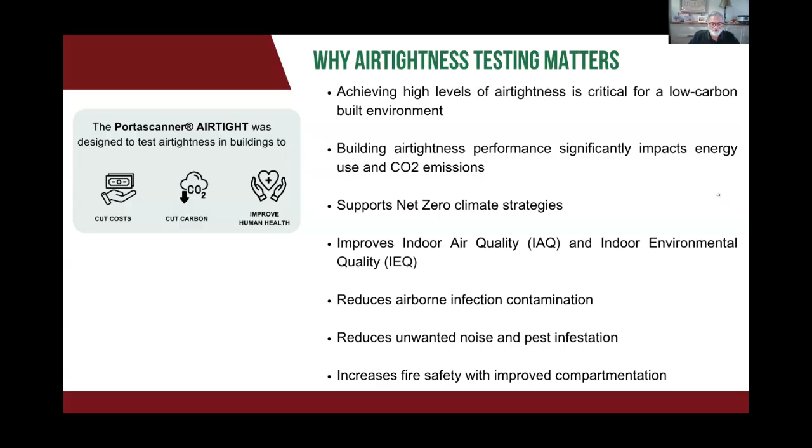Okay, so typically when we talk about airtightness, I think we're all familiar with the blower door. That is still required by most certifying bodies, from ResNet to PHIUS to PHI. It measures the air changes per hour, and it will tell you when something is wrong, but it will not tell you what is wrong, where that is, and how to fix it. So to do that, how do we find and localize what is causing the blower door failure?

The oldest method is probably smoke pencils. Old enough that I've heard stories of people just walking around with lit cigarettes in the old days. But if not that, smoke pencils, seeing where the smoke is being drawn to, is useful, but obviously scattershot. And the bigger the building, the more difficult that is and harder to replicate. It also requires a level of pressurization, so you have to already have a contained, enclosed building for it to be effective.

Anemometers can be helpful if you know where the leak is, but a lot of the trouble is finding that leak in the first place. There's a problem somewhere, you're not sealed tightly, but you don't know where. It's a pinpoint tool that would require you to either already know where the leak is, or have a ton of patience going inch by inch to identify where it is.

And then finally, thermal cameras, which are effective if you have a temperature differential from the inside to the outside, which is not always the case. Also, if you're in mid-construction and it's not fully complete and you're exposed, it's basically useless. It can be very good for thermal bridges and those sorts of things, again if you have a temperature differential, but not necessarily the best way to find an air leak.

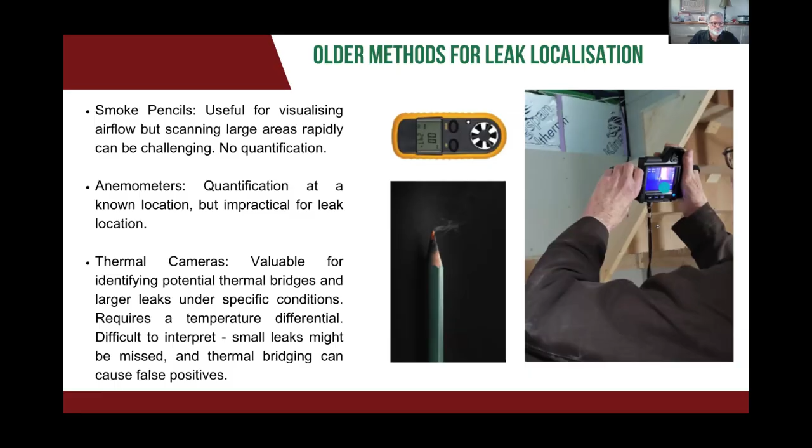So with those kind of imperfect tools at hand, what are we looking for in a better tool? What would it have to achieve? We really need to be able to quickly assess the airtightness of the building, and to be able to do it at any stage of construction. One of the tremendous downsides of the blower door test is obviously the preparation required, sealing everything, closing everything down, usually removing the crews for some period of time, and then just getting that overall binary yes or no, without any accuracy as to where the problem is.

It's intrusive, it's disruptive, it's expensive if you're hiring someone else to come implement the test, only to find that you've not achieved your goal and then have to schedule another one after you've done the work of finding it.

So what we want is something that's accurate, something that is easily set up, that can be repeated through different phases of construction, something that has an unambiguous result, right? It's not "somewhere there's a problem." It lets us localize exactly where the failures are so we can focus on what remediation is needed. And those really work together.

We'll talk a little bit later about how we at Source are seeing people use the technology in the North American market. It can be deployed quickly, repeatedly, each step of the way, for very little cost and with very little time. It doesn't become a whole milestone in the process where you're building towards the blower door coming; it's just, hey, let's quickly run a scan, see how we did. And you can do that each step of the way. So I think it represents a tremendous value beyond these other methods.

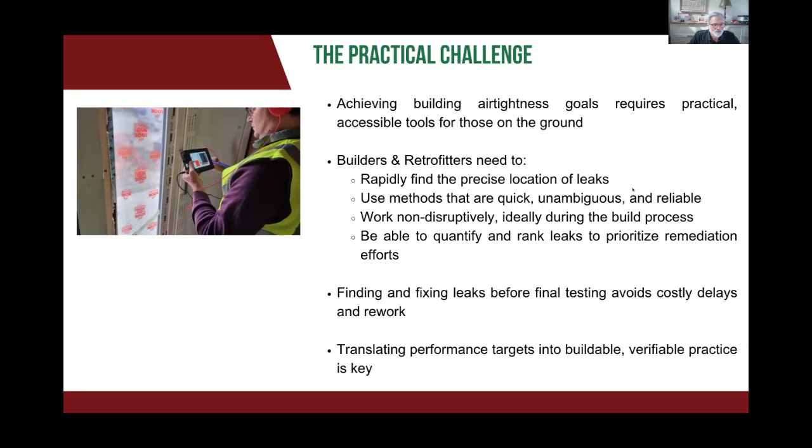I'm going to be very happy to dig into that a little bit, but I think Daniel wants to talk to you a little bit about the development of the technology, and then I'll be back in a minute.

Thank you, John. So the development of the technology is quite an interesting history. Our company's been around for over 30 years, and an industry which we have been in for that long is the maritime and naval sectors. Watertight integrity is a really important factor in that, and we've developed technologies for that for years and years. It was 2020 really when we thought about applying this to airtightness.

We were given a grant by the UK government for research and development that would help mitigate the spread of COVID-19 in hospitals. And so, in a frenzied nine-month period, we devoted some resource to this. We discovered that it was possible to quantify leakage size ultrasonically in terms of air leaks.

And we deployed this for hospital wards, where for airborne diseases it's important to pressurize these facilities. Often they're negatively pressurized, but sometimes you have positive pressurization. In order to achieve that and maintain it, you need to ensure that a maximum threshold of air permeability is not exceeded. So we developed this technology, and we very quickly recognized that if you can do it in hospitals, you can do it in any building, and the applications beyond the spread of disease are huge.

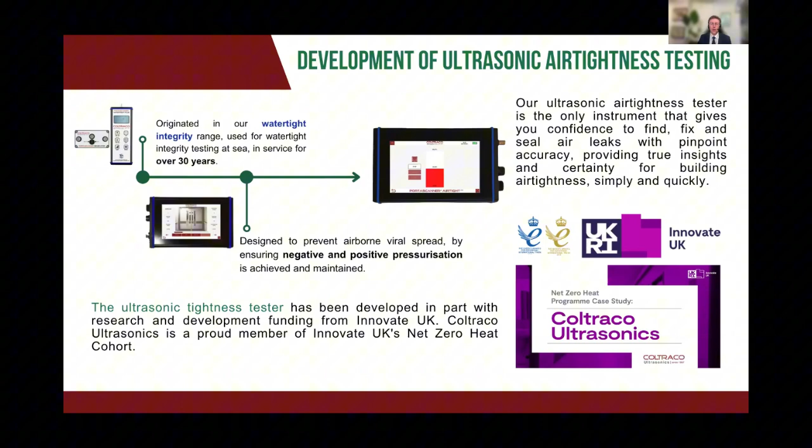As a result of this research work, we were invited to be on Innovate UK's Net Zero Heat cohort, which is a group of innovative companies in the UK who are gearing towards net zero and producing technologies to that end. It's been a great honor to sit on that panel. Back over to you, John.

But the idea is to have this outside the building, positioned in a way it projects like a movie projector would. So the further back you are, the further it casts, the more of the surface of the exterior it's covering. It comes with a placement guide that shows you exactly how far back you can be to stay within the intensity range you need to cover as much of the building as possible, and obviously it's super easy to reposition as you move around from one area to the next. So that is now blanketing the exterior with sound, with ultrasound.

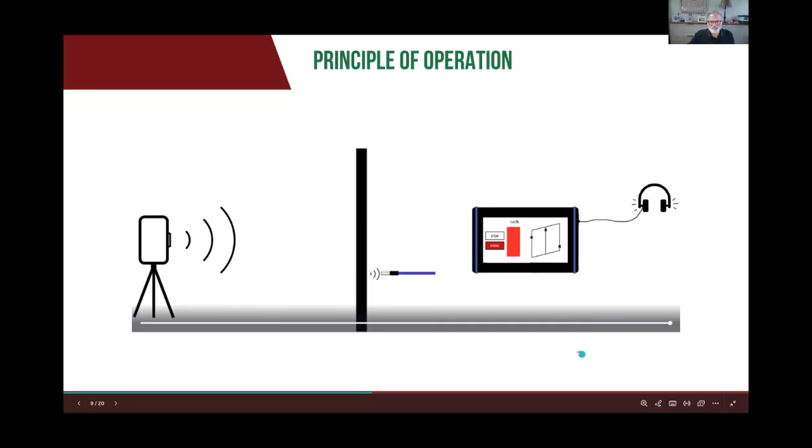So I think this is a little animation of the process I just described, where the generator's on the outside, and you are listening on the inside. If you're using the headphones, that's the experience. If you're just using the visual, you see it on the screen. The level increases as the leak becomes more severe. Okay, on to the next.

Okay, and so this is a video demonstration I did with Kevin Brennan, who some of you may know. He was a past instructor and man about town in these areas, where he was working on a project in Manhattan. And I just did a quick walkthrough just to show you what this looks like in the real world. So we'll just let this play. It's only about 2 minutes.

Hi, my name is John Knapp. I'm the co-founder of Source 2050. We're here on 25th Street in Manhattan. Great project that's underway. It's a firehouse retrofit to a single family home. And I'm here looking at the Coltraco ultrasonic Portascanner today.

It's an air tightness detection device that works off of ultrasonic frequencies. We have a transmitter that's just through the window here, which we've set outside, that's transmitting ultrasonic waves through the back of this house. And I have here a scanner that's detecting if any of those are getting through the wall. So it allows us to detect whether there's any gaps in the air tightness barrier that need to be remediated. So I've been scanning through with Kevin and found nothing.

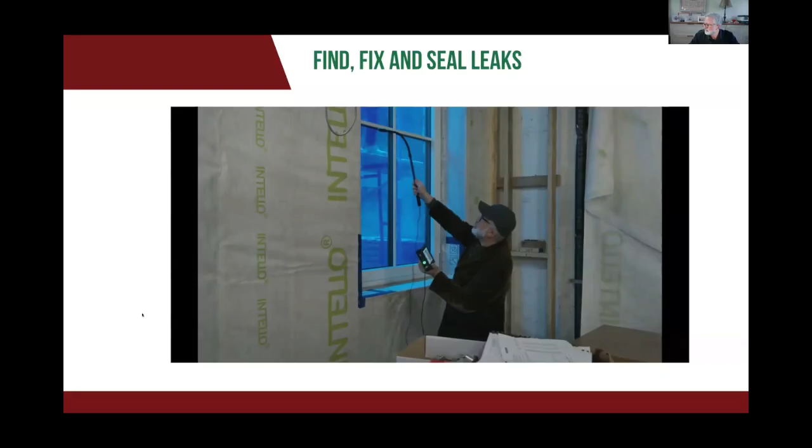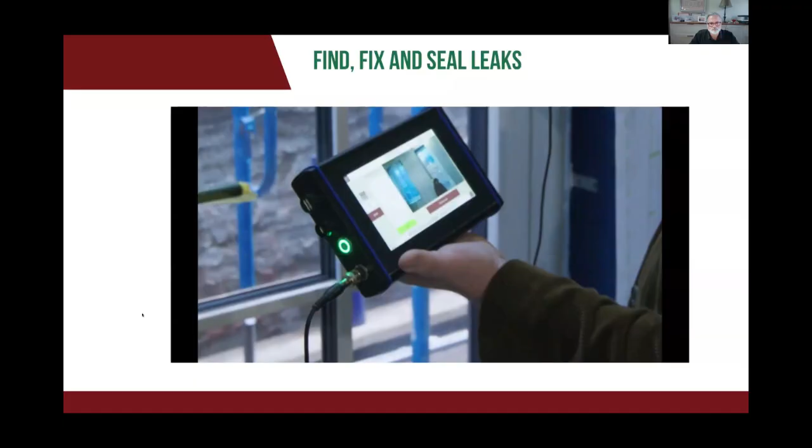As we were coming around the door, everything is nice and tight, but I got to this spot right here where I started to see some activity, some red and green popping through the bottom of the meter. So I talked to Kevin. I said, what could that possibly be? And it looks like it's simply that we have some masking tape in here to protect the door frame, and that the gaskets are not thrown on the door, so it's not fully tight.

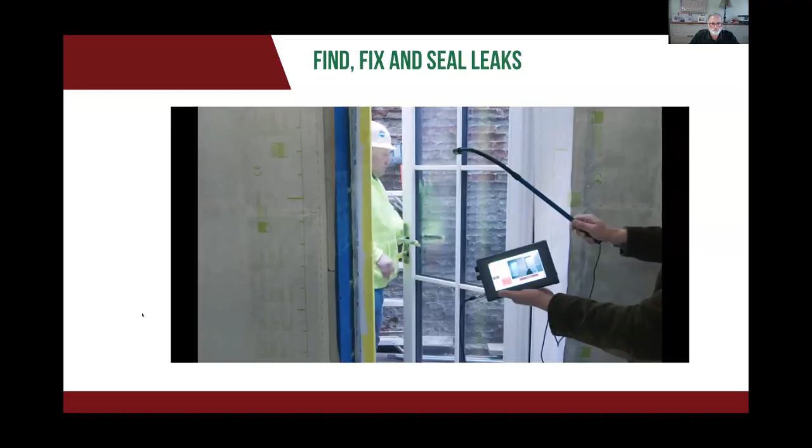So Kevin tightened up the door. I redetected it. It's airtight. The entire signal has gone away. So it's a really nice test case of the sensitivity of the meter. But I was talking to Kevin, like, if this had not been that easy to fix, if it had been somewhere else in the attic or something else, how would this have been useful to you?

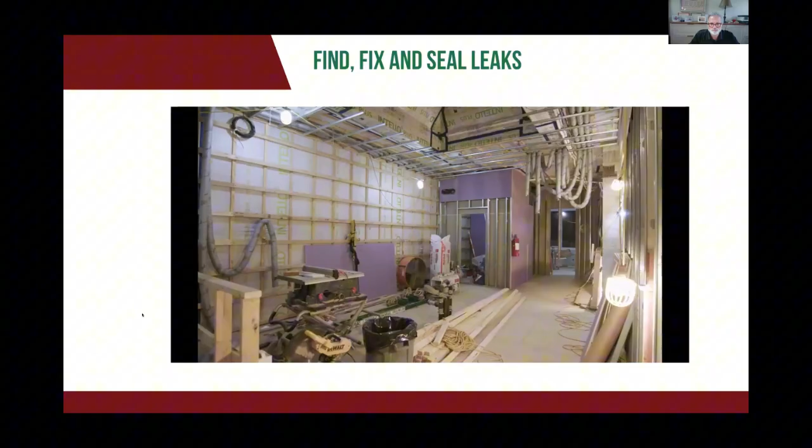And if we detected it in the system, it'd be easy to mark that off and then throw the crew and bring in some foam. Take a shape, take a Sharpie, mark where it is, and then fix it and tape it. Great. Find the leak, seal the leak, fix the leak. Great. Yeah. And then test it again, make sure it's sealed.

Yeah. And you can see that you're able to take a picture of every wall that you scan and then mark it up with where you detected the leaks. And then as they're remediated, you can remove them. As Kevin said, if you've really got your air sealing crew on your elbow, you can also just mark up where it needs to be, and you can do a whole room, and they can come through and then seal where they need to seal.

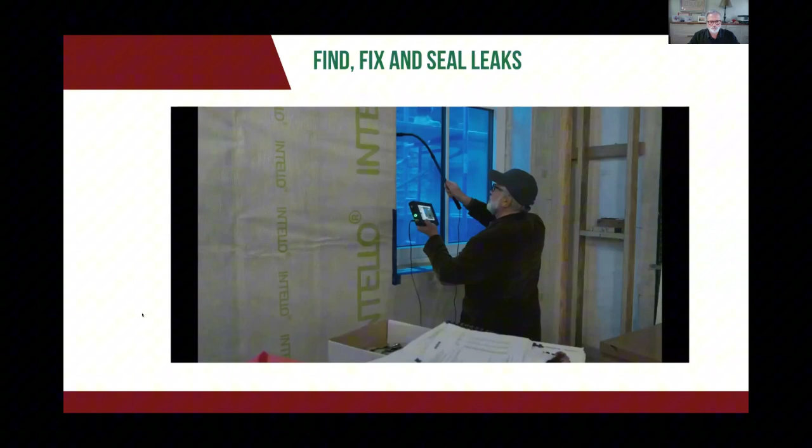So it's pretty interesting. Instead of walking around with smoke pencils and fog machines and trying to track where things are going, you get a pretty crystal clear image of where there's any weaknesses in the air barrier. Cool.

Great. So just to wrap up, a quick comment on the video, and then Daniel will take you through the research they've been doing in the UK. I joked around. I was nervous about using that as a test case because Kevin, if you know Kevin, he is known to be absolutely meticulous in his air tightness and air sealing. So I was wondering if we were even going to have something to demonstrate it, because his buildings are typically so tight.

And luckily, he simply had some masking tape across the hardware so that the hardware wouldn't throw on that door, which presented the issue. Which was obviously easy to remediate. It's different than if the membrane wasn't hung properly or terminated properly, or the door had some racking on it. It would be a more involved remedy.

But it wound up being a really good demonstrative for us, because as you can see, as soon as I went down the door, there was a massive problem right around the hardware, and it was simply taking the masking tape off, allowing it to fully engage the gaskets, and then it was resolved. So pretty simple solve there, but also a really good demonstration for how quickly it was able to detect that problem. Okay. Over to you, Daniel.

Thank you, John. Yeah, so following the development of the technology, we've undertaken a little bit more research, and we've partnered with an institution in the UK called Leeds Beckett University, which really focuses on building sustainability. They've got a big building sustainability center there, and Professor David Johnston, we've now been collaborating with for a few years. When we spoke to him initially, he said that the airtightness performance of building fabric can have a significant impact on energy use and CO2 emissions, as we know.

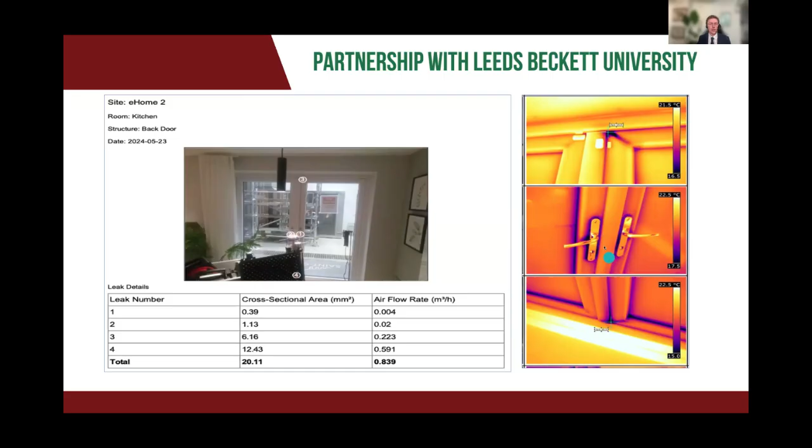If we compare that to the thermographic imagery, we can see that it does match up. You can see at the top and the bottom that there are some darker spots. However, it's not completely clear, and you can also see this dark line around the edge of the window, which we think is probably thermal bridging, because there's clearly no air leak or any air flowing between that glass panel and the edge of the door. So that demonstrates you can identify air leaks thermographically, and they do match up with ultrasonic tests, but it's a little unclear which are just thermal bridging and which are air leakage.

The study itself occurred in three different environments. We had a controlled environment, essentially a recording studio broken up by a dividing wall. We took out part of that wall and replaced it with a double ply layer, then introduced our own very specifically sized leaks. So this was a very controlled environment, relatively airtight. The idea was to control the size of the leaks and then measure them.

The question was: is the device quantifying them in an accurate way? The second set of tests was in a partially controlled environment, essentially a full passive house property built within a university facility, a big building with climate control capabilities. The third was a number of uncontrolled real-world environment tests, across a number of different properties and buildings.

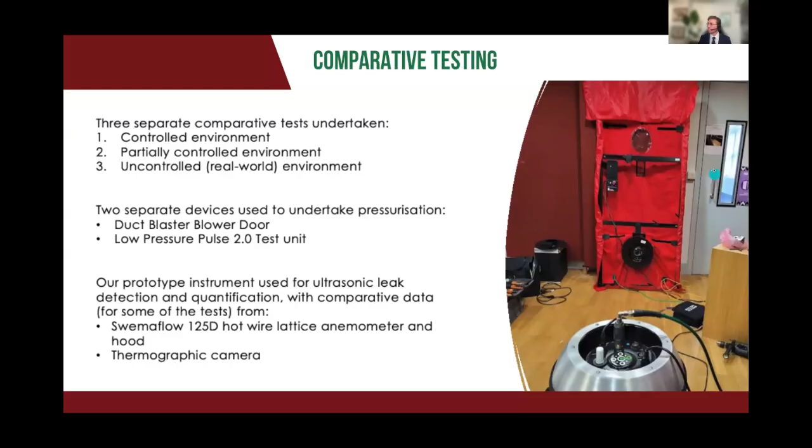So these were the results in the controlled environment. The thing that immediately jumps out is that there's a clear trend with the ultrasonic tests, but the other tests were all a little bit all over the place. This was unexpected at first, but then we realized that in this environment it really should be expected, because what this is comparing is the equivalent leakage area as determined with the blower door and the pulse test method.

We're comparing that to the airflow measurable through some very small leaks, with hole diameters of 2 millimeters all the way up to around 12 millimeters. If you imagine within a whole room, a singular leakage point is well within the error capability of a blower door. So the air permeability, or the CFM reported by a blower door test, is typically much larger, and one single leak isn't going to make a large difference. Even the bigger leaks in this range didn't produce a noticeable increase we could track in the equivalent leakage area.

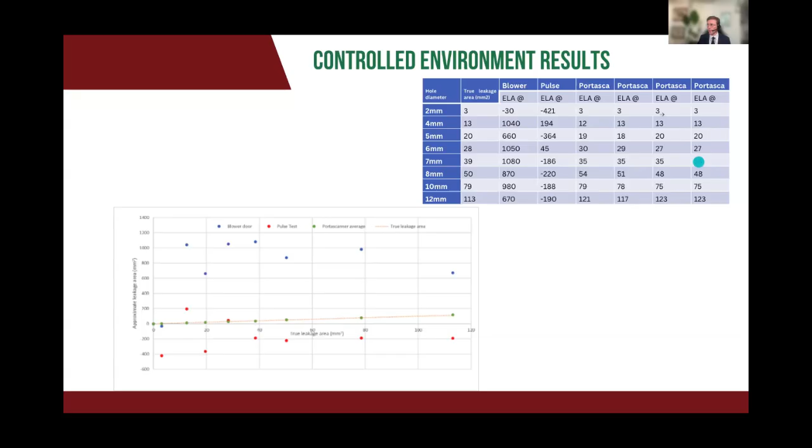Moving on to the partially controlled environment tests, this was at a place called the Salford Energy House at the University of Salford. The purpose was to compare ultrasonic testing with blower door and thermographic tests together. While the ultrasonic testing was going on, we were also pressurizing the space, and there was a thermal differential. These were done blind: we had the professor and some of his research staff doing the thermography, while myself and a colleague were doing the ultrasonic tests.

What we found is that when the results were ultimately compared, the thermography identified significant direct and indirect leaks, such as hatches, ventilators, doors, and ceiling voids. But there were limitations in terms of quantification and exactly how to interpret between the leaks and the thermal bridging. The ultrasonic testing found and quantified all of the direct leaks as well, including notably the trickle ventilators and leaks in and around doors.

The ceiling voids were a little bit more difficult to pick up ultrasonically, but the air permeability that was derived from the ultrasonic tests matched with the blower door tests. The direct leaks that were picked up also matched, and the ultrasonic instrument was able to provide additional flow rate data associated with each leak.

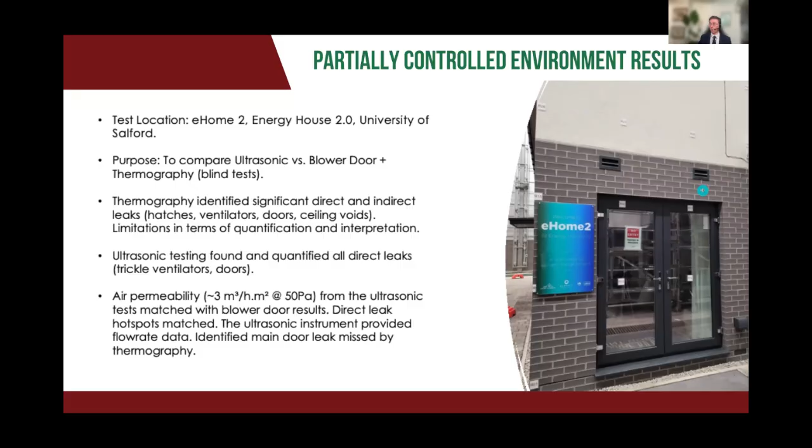The final point is that because we had to install the blower door on one of the doors, that door wasn't actually able to be tested thermographically. Once the blower door kit had been taken away and the door reinstalled, we were able to identify some significant leaks around that door ultrasonically. So that's just one thing to bear in mind, that there's a use there as well.

Moving on to the real world tests. We've now done the partially controlled test. We're moving on to real properties, and there were a number of different buildings we tested, including one currently under construction - a high school in Edinburgh, built to passive house standards, against a very high standard of air permeability.

But it's a very large building, so quite difficult to pressurize in order to do a blower door test. So what they did was section off different parts of that big space using medium density fiberboard, placed across a space to compartmentalize it into a smaller area, and then pressurize that space and identify the leakage going out into the outside world. The challenge with doing that, though, is that you don't know exactly how airtight that artificially constructed layer is.

The ultrasonic device was very useful for that, because they could install that division, go around with the ultrasonic test and find if there were any leaks that needed to be sealed with masking tape before they did the pressurization. So that was quite an interesting study.

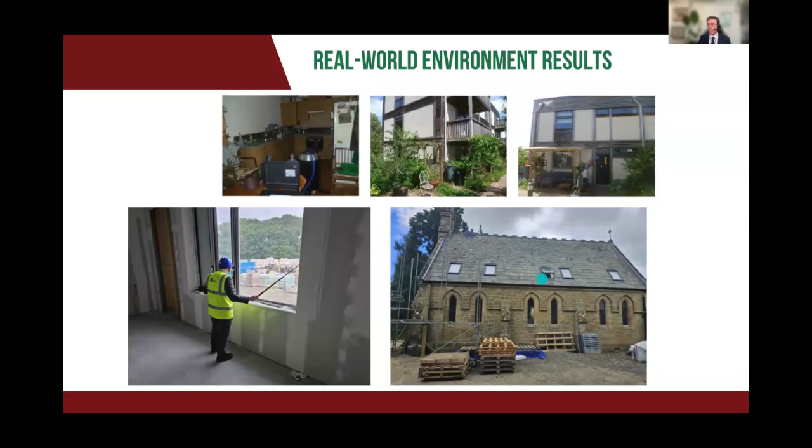In fact, where the wiring went too close to the seal, it had actually led to some air inflow getting through there. So we were able to pick that up ultrasonically, which meant the wiring had to be adjusted and the seal could be returned to its non-compromised state.

So ultimately, this has led to a published paper. We've got another one in the works as well for a journal article. But this was for a conference, the Build Air Symposium in Germany.

The headline finding is that ultrasonic air tightness quantification consistently measured within plus or minus 10% of the actual leakage area of all the known leaks we were testing. And even very small leaks could be accurately measured - we can detect leaks as small as 0.06 millimeters, which is the thickness of a human hair, and we can quantify them, at least we've tested it down to 0.5 millimeters in diameter.

Ultrasound also can excel in identifying problem areas that traditional tests might overlook or fail to quantify.

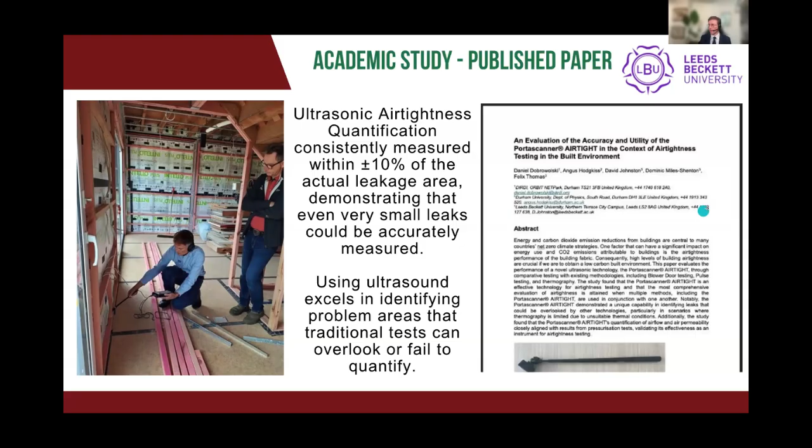Thank you, Daniel. We've sort of been in the front seat here, and it's been really exciting to bring Cultraco into the North American market. What that's allowed us to see is really just the incredible diversity of use cases that people have found for it. I assumed this would be an absolute dream for passive house consultants, because it's the perfect way to prepare for the blower door test and pinpoint problems so you can quickly remediate them. That's certainly one use case, and we'll come back to that. But what's been exciting is to see all along the chain, from production down to verification, the many uses people have found for this technology.

We have a testimonial from Signature Building Systems, a modular company in Pennsylvania doing really incredible work. They did a project in the Bronx, which is how we found out about them. We did the testing for them, and they wound up incorporating the technology into their actual factory. Now, as the boxes are completed, instead of ad hoc blower door testing—time consuming and not accurate as to where there's a failure—they're able to test right there as the boxes are loaded onto trucks as a final QA, and then again after install.

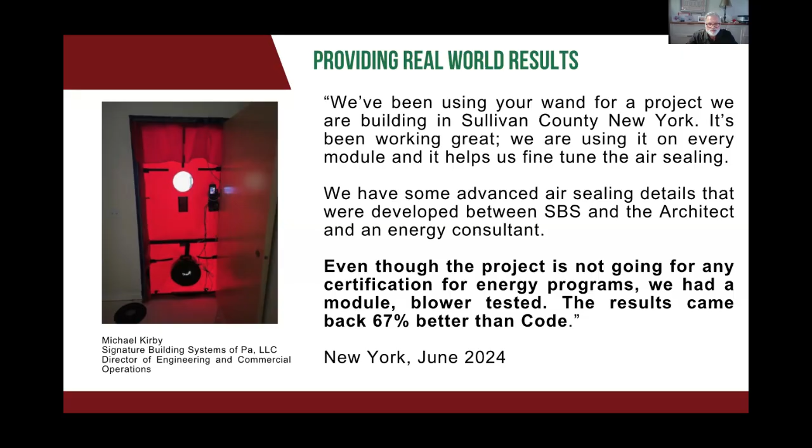So yeah, I think that's the real world results piece. Daniel, do you have another slide before we move into the Q&A? I think you might have. Yeah, yes, you do. Yeah, that's right.

So just to give you an example of a project where not using ultrasonic technology could actually lead to a lot of extra cost and delays. I think this is actually quite common if you're trying to do a new build or a retrofit that needs to meet a certain standard, but you're doing it blind because you don't know where the leaks are. This is an archetypical example of how that can go wrong.

So this is a case study by the Passive House Institute in Bavaria, Germany. It's a moderately sized dwelling that was retrofitted to Passive House standards, and it required 3 different remediation cycles in order to finally meet that standard. All of the basic things were done, where you had more insulation installed, new components, etc.

But when it came to the blower door test, it failed. And so they were attempting to remediate this, but they didn't use ultrasonic technology. So they weren't able to guarantee that those remedial measures were even in the right place, let alone effective. And so 3 cycles occurred, and we calculated that as $30,000 of avoidable cost just from this small building.

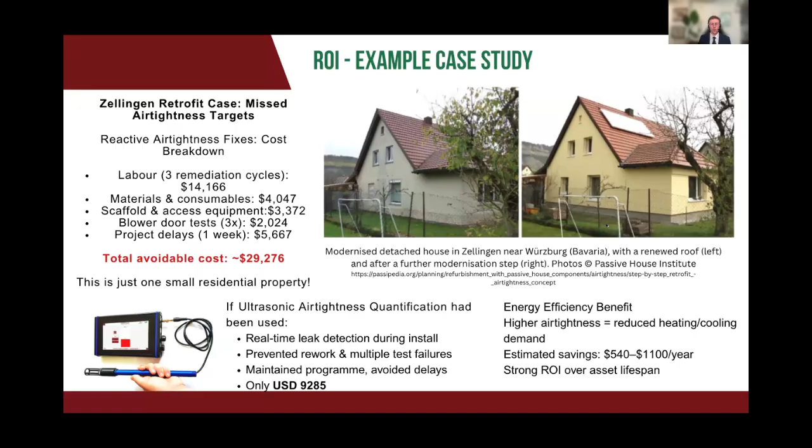Now imagine that you're using that for multiple buildings, and the cost saving elements are quite clear. Add to that the energy efficiency savings as well, and it's a case that can be very easily made for the importance of ultrasonic instrumentation. And that's on to our final slide, so we can answer some of the questions.

Yeah, great. Thank you, Danielle and John. And we have some time for questions. We have some questions coming in.